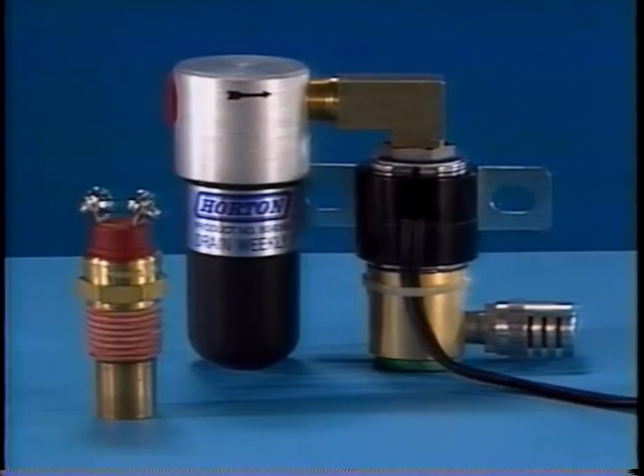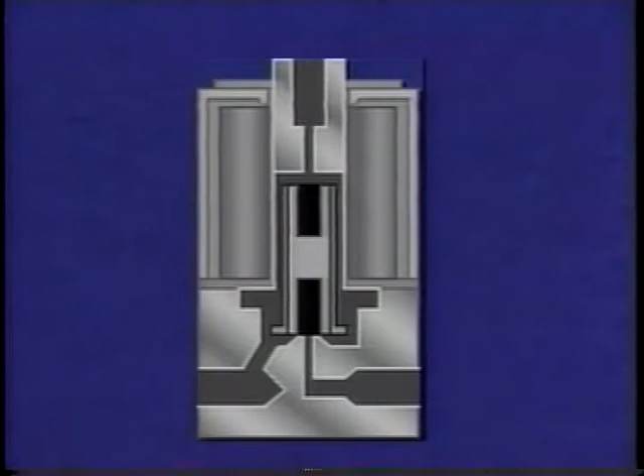At the heart of every control system is the Horton three-way solenoid valve. The solenoid valve has 3 ports, allowing it to be plumbed 2 ways: normally open and normally closed. Here, the valve is plumbed for normally open operation.

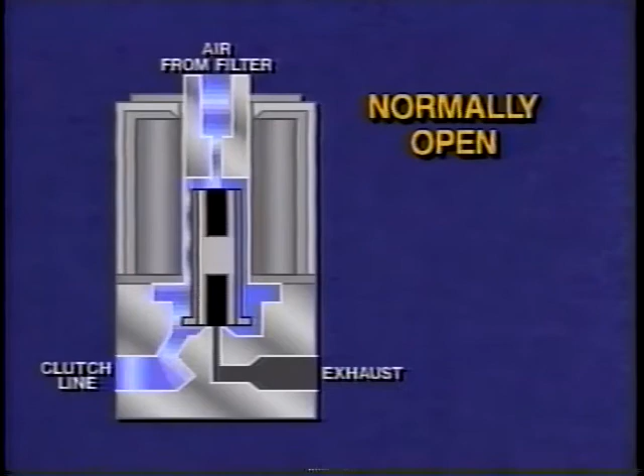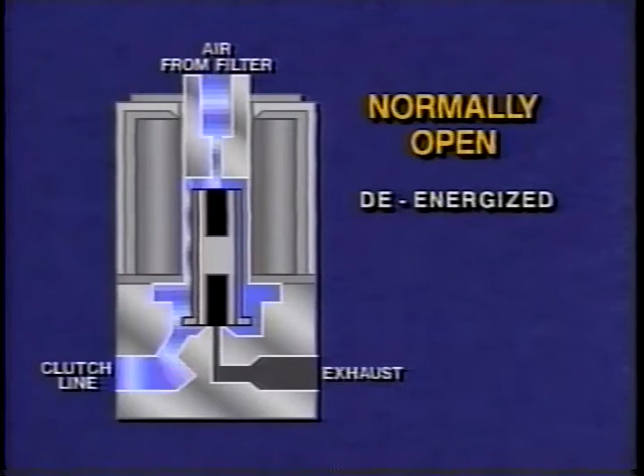Air enters the end port of the valve via the air filter. Inside the valve, the plunger is surrounded by an electromagnet. Without electricity, the magnet is de-energized and the plunger is held against the lower seat. This opens the upper seat and allows the air supply to flow through the valve into the clutch.

With electricity, the magnet in the solenoid valve is energized and pulls the plunger upward, blocking the air supply at the upper seat. As the plunger is lifted, air in the line is allowed to exhaust through the lower seat, disengaging the clutch.

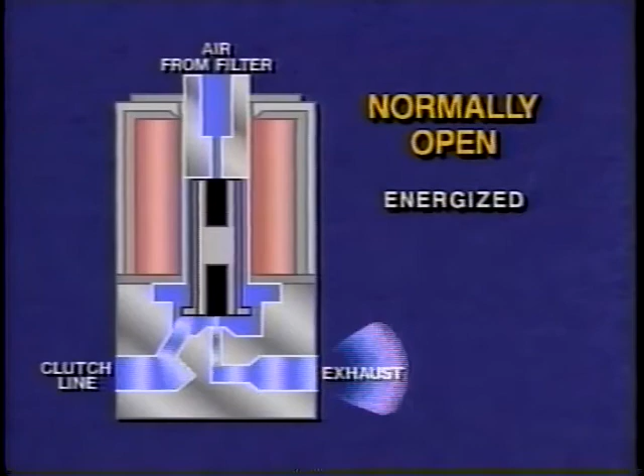Now we'll plumb the three-way solenoid valve to operate in the normally closed mode. Air enters the side port of the three-way solenoid valve via the air filter. When no electricity is applied and the electromagnet is de-energized, the plunger is held against the lower seat and airflow to the clutch is blocked.

Once again, due to the movement of the plunger, the clutch is allowed to exhaust its air through the opposite port, in this case the upper seat. When electricity is applied, the electromagnet pulls the plunger up, blocking the upper seat and allowing air to flow to the clutch through the lower seat.

As you can see, the Horton three-way solenoid valve filter assembly manages the operation of the Horton fan clutches practically by itself. So when we speak of controls, we're really talking about controlling the operation of the three-way valve.

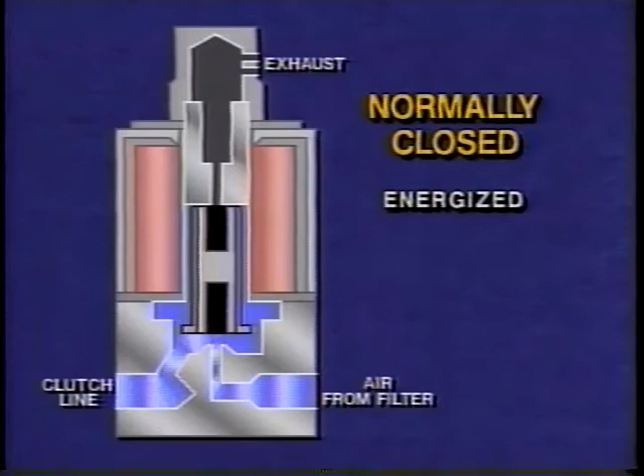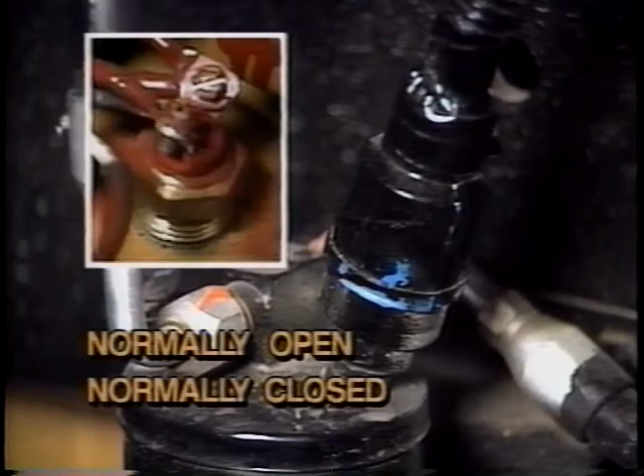A basic control system consists of a thermal switch and a freon pressure switch. Just like the three-way valve filter assembly, an electrical control system can be designated either normally open or normally closed, depending on the type of controls or switches that are used.

In a normally open electrical control system, all the switches will be open or off in their normal or resting state. This is a state at which the engine temperature is below the thermal switch setting and the air conditioner's freon pressure is lower than the freon pressure switch setting.

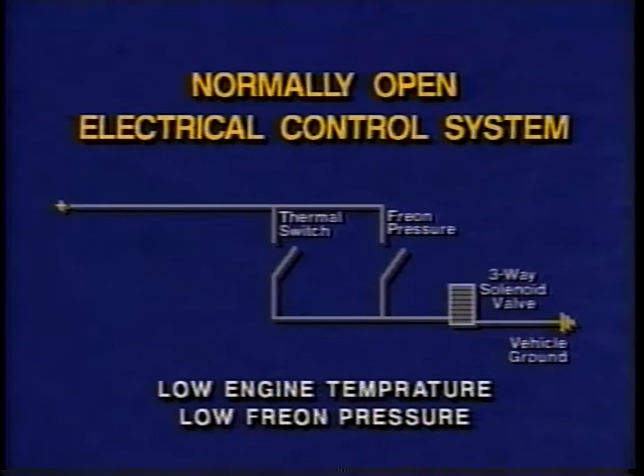A normally closed electrical control system is just the opposite. The switches will be closed or on in their normal or resting state.

The most important thing to remember is that you must use a normally closed three-way solenoid valve filter assembly with a normally open electrical control system, and a normally open three-way valve filter assembly with a normally closed control system.

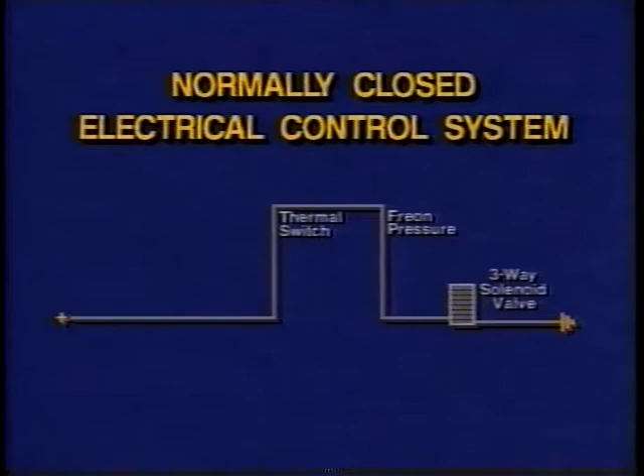This is easy to remember when you understand how the proper wiring of the controls or switches creates a logic state. In this normally closed electric control system, we want the logic state of the switches to indicate if either switch is opened. To do this, a series connection is used.

Electricity runs from the accessory or ignition terminal into the plus terminal on the thermal switch, out of the other thermal switch terminal, and into one of the terminals on the freon pressure switch, out of the other freon pressure switch terminal, and to the three-way valve lead wire. The other three-way valve wire is grounded.

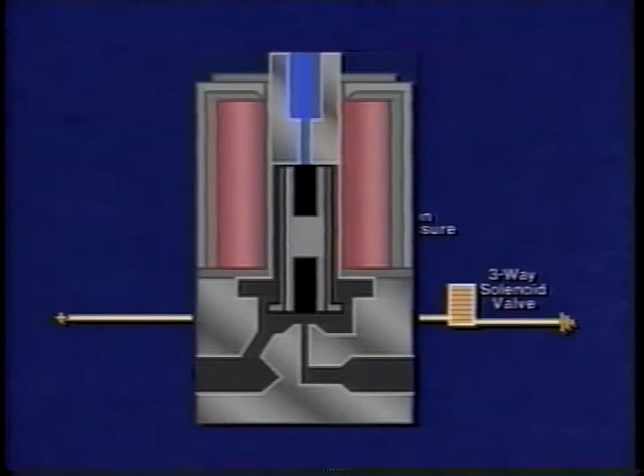Remember, a normally closed electrical control system is used to control a normally open three-way valve, and the electricity passing through the closed electrical circuit holds the three-way valve in its energized or closed state. The fan clutch is disengaged.

If engine temperature rises above the thermal switch setting, or the air conditioner's freon pressure exceeds that of the freon pressure switch setting, the series circuit will be broken or open. No electricity flows to the three-way valve, allowing it to return to its de-energized or normally open state.

Air flows through the valve filter assembly to the fan clutch, and the fan clutch is engaged.

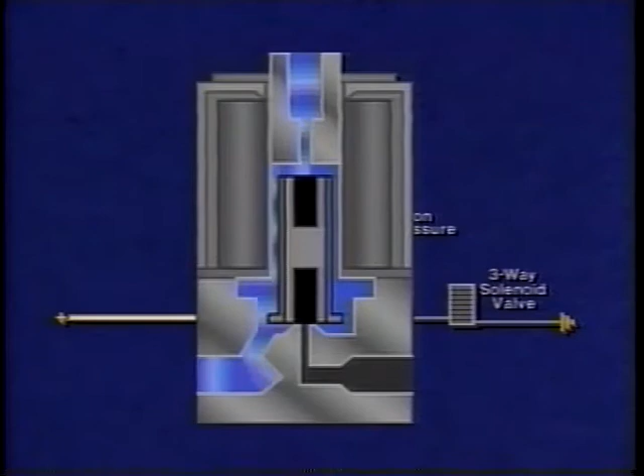Optional controls can be added to this series circuit. To install a manual switch, for example, insert the switch into the series chain so that electricity must flow through the switch when it is closed, just like the other controls. Remember the logic: any switch that opens breaks the flow of electricity through the entire control circuit.

Now, with the addition of the manual switch to this normally closed electrical control system, the on or closed position of the switch is the automatic mode, and the off position is for manual engagement of the fan clutch.

In a normally open electric control system, we want the logic state of the circuit to indicate if a switch is closed. Normally open electric control systems are wired as a parallel circuit. A parallel circuit is made by connecting the positive terminals of all the switches to the ignition terminal and connecting all of the negative switch terminals to the lead wire on the three-way solenoid valve.

Now let's trace the logic as we operate the circuit. With the engine running at a temperature below that of the thermal switch setting, and the air conditioner's freon pressure below the setting of the freon pressure switch, all the switches are in their open or off position. The electrical circuit is therefore open, and no electricity is sent to the three-way solenoid valve.

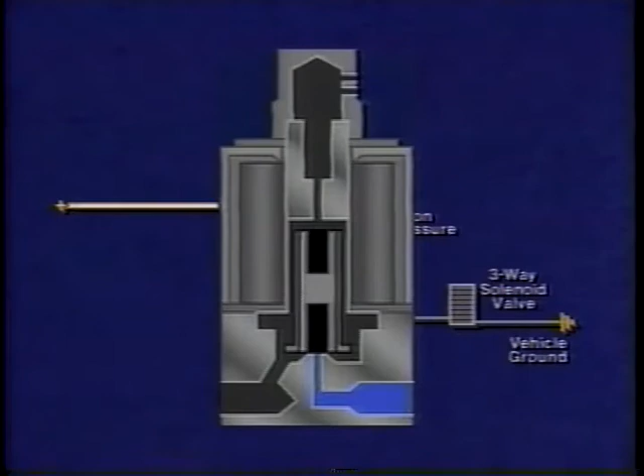The normally closed three-way solenoid valve - remember, a normally closed three-way valve is used for a normally open electrical control system, and vice versa - is de-energized and remains in its normal or closed state. The air supply to the fan clutch is stopped, and the clutch is disengaged.

When we look at the parallel and series circuits side by side, we see that the parallel circuit has more wires. It's this redundancy in wiring that allows each normally open switch in the circuit to send electricity directly to the three-way solenoid valve.

Now, with the engine running, if the engine temperature is higher than the setting on the thermal switch, or the freon pressure is at a higher level than that set on the pressure switch, electricity is passed through the circuit to the three-way valve.

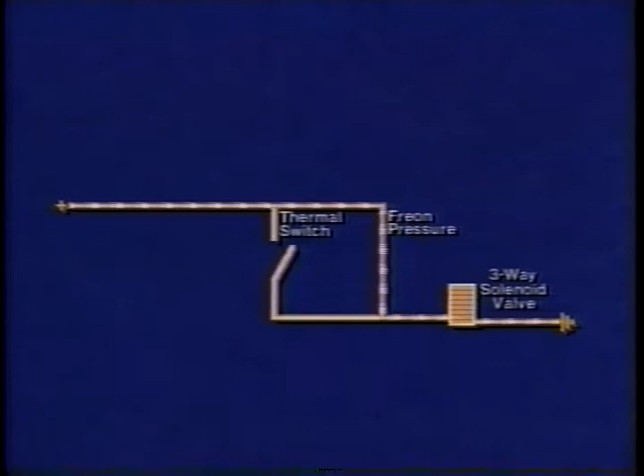The normally closed three-way valve is energized and held in its open position, allowing the air supply to reach the fan clutch. The fan clutch is engaged.

As with the normally closed or series electrical control system, optional switches can be added. Always remember the logic of the parallel circuit: the switches are all normally open, and the closing of either one must complete a circuit.

Now, to add a manual switch, make sure that one of the switch contacts is connected to the ignition and the other is connected to the three-way solenoid valve lead wire.

Like the other switches in the normally open control system, the open or off position of the manual switch is for automatic operation. Can you see how in the normally open control system, a switch is never dependent on any other switch for completing a circuit to energize the three-way solenoid valve?

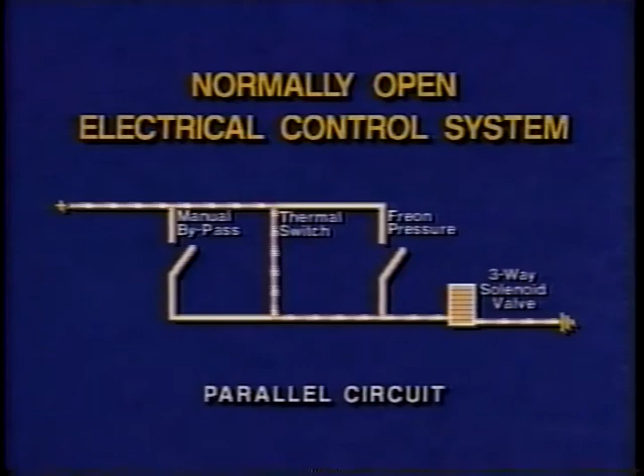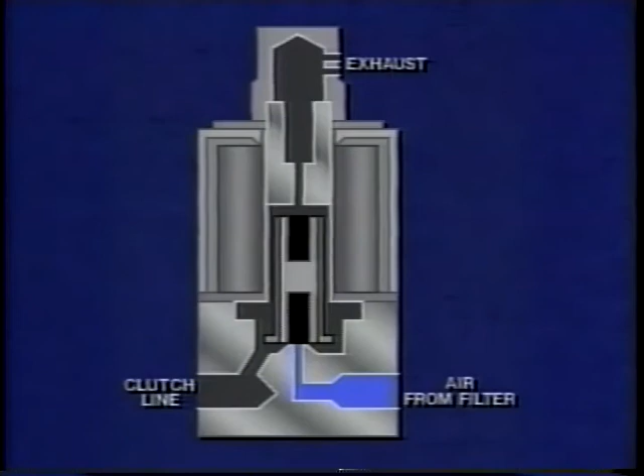You should now have a thorough understanding of how controls and the Horton three-way solenoid valve filter assembly regulate the operation of a Horton fan clutch. For three-way valve and thermal switch part numbers, refer to the Horton product line catalog.

Through your understanding of the circuit logic used by these controls, and by following the basic rules presented in this program, you will be able to perform efficient and effective installation and service of Horton fan clutch control systems.